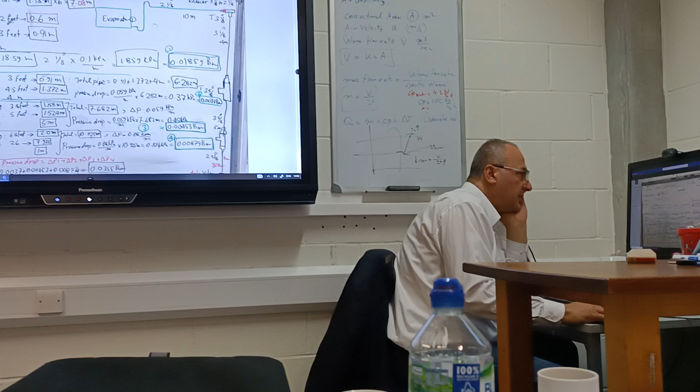Then we have an enlarging coupling, this one. This enlarging coupling will go into that T. So the enlarging coupling is 2 feet, or 0.6 meters.

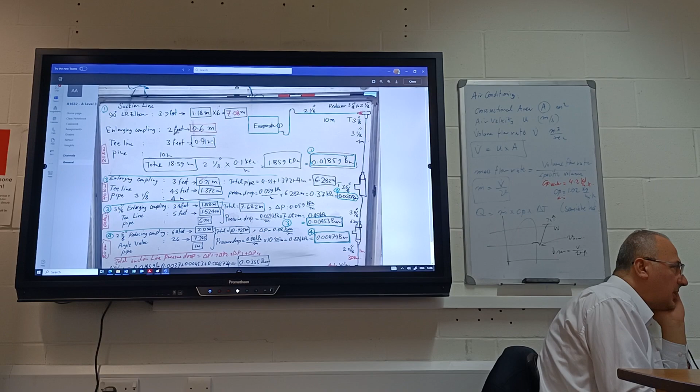Then I have a T, line T, 0.91. Then I have 10 meter pipe. I will repeat it on that diagram. Here.

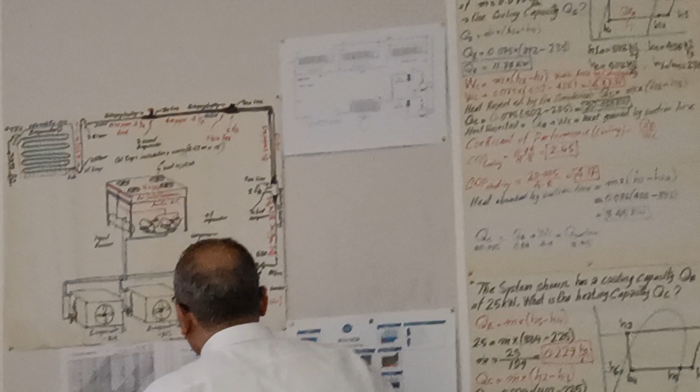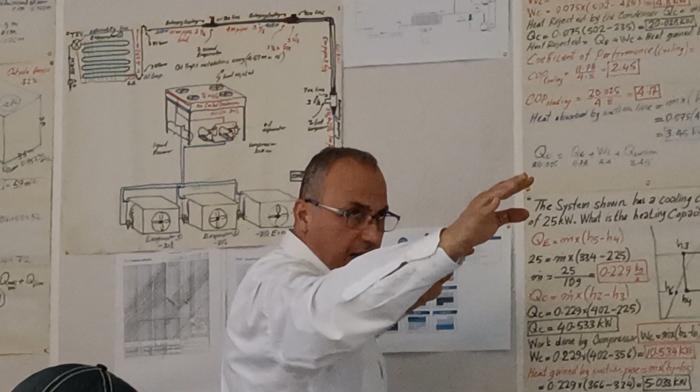It depends how many elbows you count. Here you have 1, 2, 3, you can reduce it, finish. I have 3 elbows, I have 6 elbows there. Each elbow is 1.18, so you can multiply it by 3 now, and you get less than that.

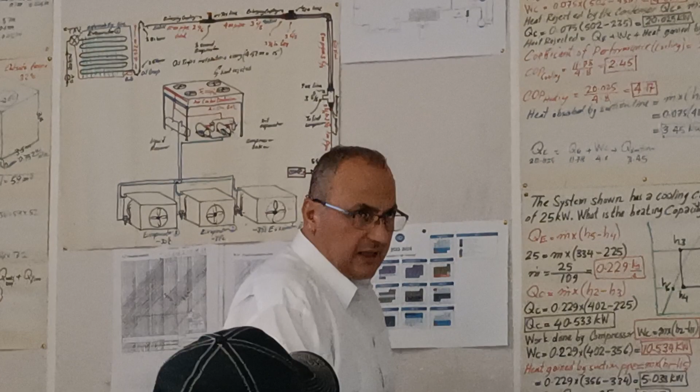Then, this is here to go into the other T that is coming from this one. You see this one? Joining that, so it's joining as a T. That T is a line T. Is a line T, so I have to increase it from 20 kilowatts to 40 kilowatts pipe.

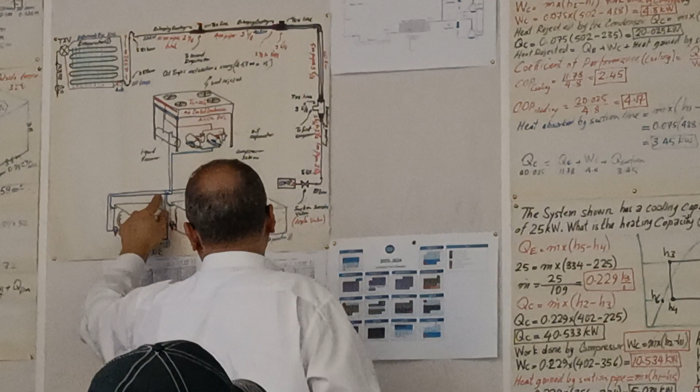I have a short one here, just like half a meter here. So from 20 kilowatts to 40 kilowatts.

So, enlarging coupling, then we go to the T. This T is larger than that. So this T is the one which is larger than that.

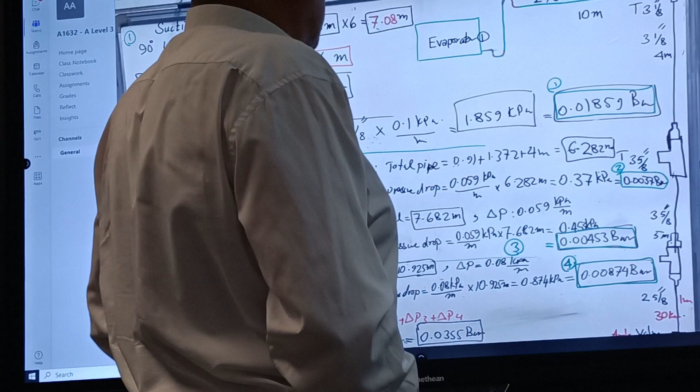It's the 3 1/8 inch. So the pipe, I put it 10 meters.

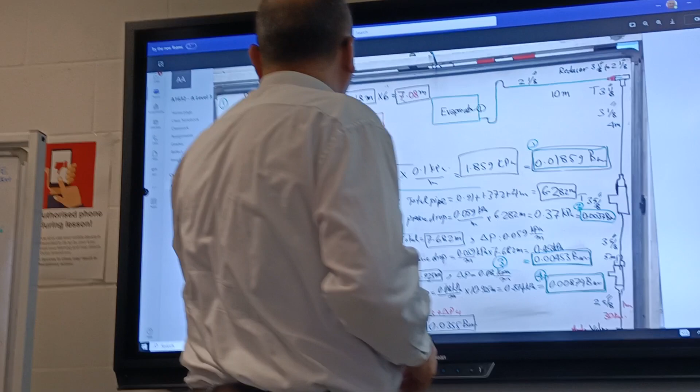You can reduce it now. Anyways, 10 meters here, you cannot reduce it. So I have 10 meters now. The total length, if you reduce this to 3.5, then that will be reduced. So as it is now, it's 18 meters and 59 centimeters.

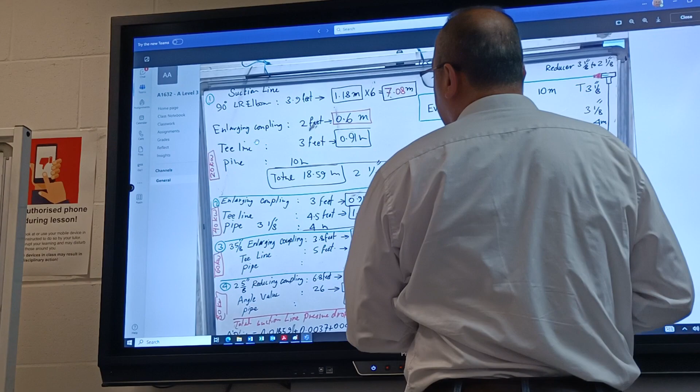This is for 2 1/8 inch. How do we know it's 2 1/8 inch? For 2 1/8 inch, my pressure drop is 0.1. You multiply that, you get that much bar.

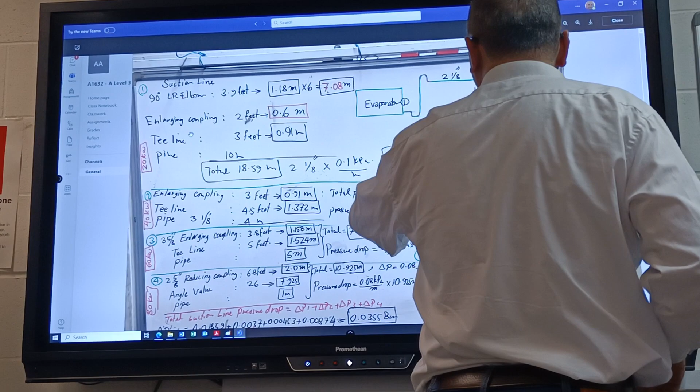Where did we get the 0.1? From the charts. Everyone knows how to get it? Yeah. Just in case if you don't know it, you go to this chart so you don't waste it.

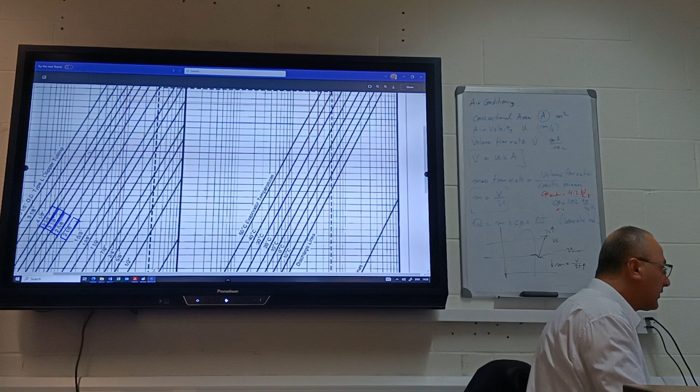You know that we have 20 kilowatts, 30 kilowatts, 40 and 60. That's the 20. You go down from the 20 to minus 30. So 20 to minus 30, I go to the left, I cut all the lines. This line.

Then I go to the condensing temperature at 40 degrees Celsius. This is my line. My velocity according to the suction line is 8 to 10. So I have to be between these two lines, not exceeding 10, not below 8.

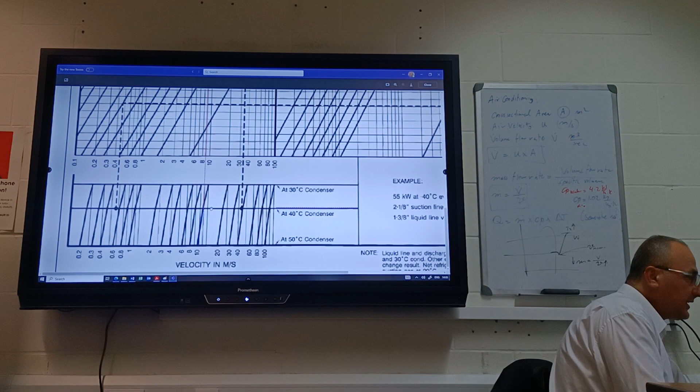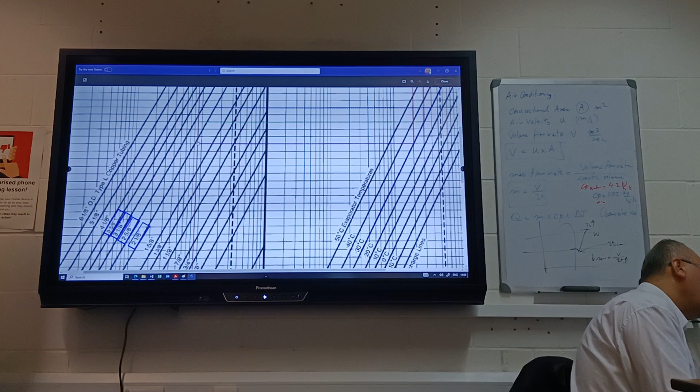Now, from here, I'll draw a vertical line to cut the line that is coming from the 20 kilowatts, which is which one? Red, this one. Violet, this one. Purple. This hand is now between 2 inch and 8 and inch and 5/8.

Inch and 5/8 is too far from it. 2 inch and 8, 2 inch and 8. You cannot go above 2 inch and 8. Because if I go above 2 inch and 8, I will end up here, 2 inch and 5/8.

And I will end up, if you go down, 6 probably, the velocity will be like 6, yeah, even below 6. So we chose that one.

Then I go from 20 to minus 30 again. And the pressure drop now. Yeah, pressure drop chart.

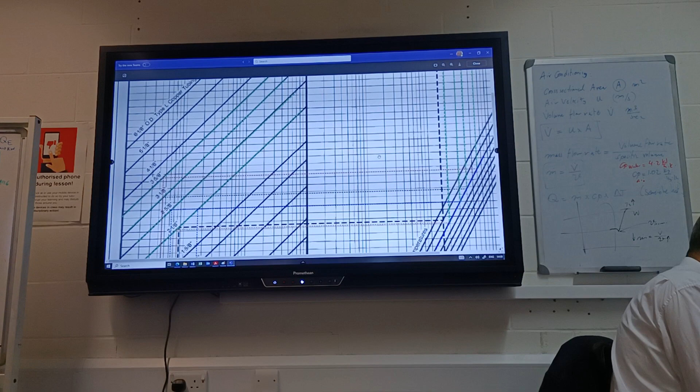Minus 30. From here, I go to the left to the 2 and 1/8 inch. I go to the 2 and 1/8 inch, then I go down. At 40 degrees, it will be here. This is 0.1 kilopascal per each meter.

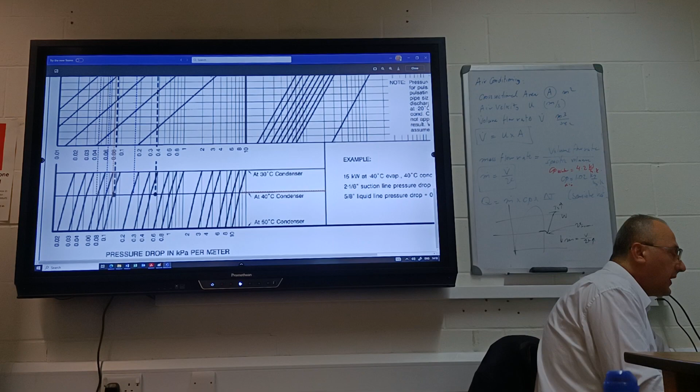0.1 kilopascal per each meter. How many meters do I have? 18.59. 18.59. Times that gives you 1.859 kilopascal, which is, you divide this by 100, it makes 0.01859 bar.

It is too much, but I cannot make the pipe larger. There is only one way to reduce these elbows. If I reduce these elbows, I can remove 3.5 meters from here. It might reduce it, so it depends what you are doing here.

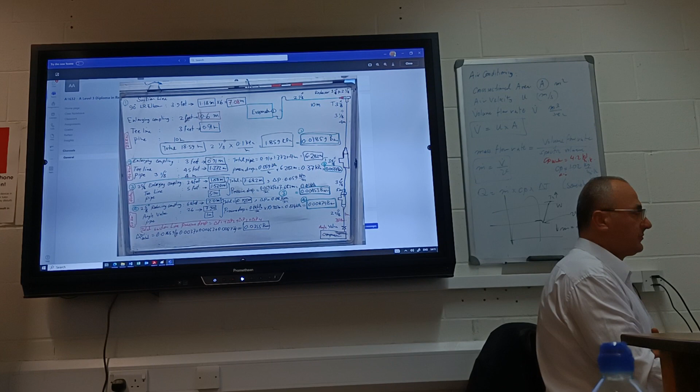You can say this is 8 meters. You reduce the elbows.

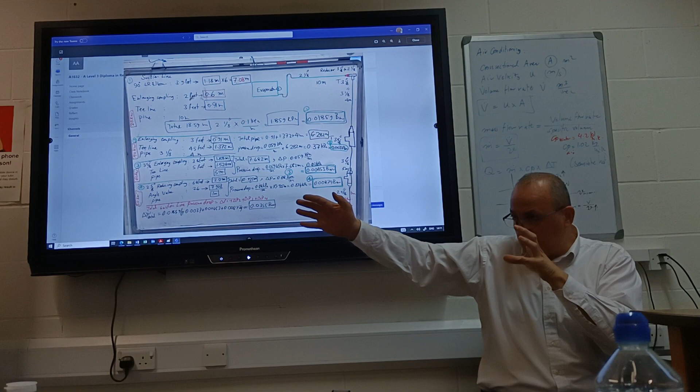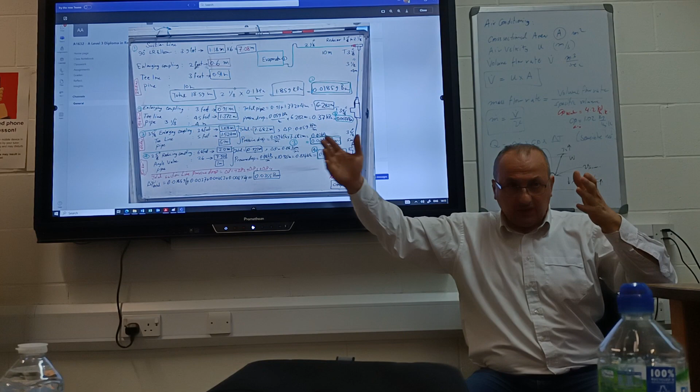But there's no way to do it with less than that drawing. I don't know how big the rooms are. You have to go from the last evaporator to the next evaporator, and very close to that you go up. That's the only way you can do it. So the distance between two rooms - if this is a room and you have another room with an evaporator, that's the size. I know the wall, there is no wall. Then roughly the distance is about a minimum of 8 to 10 meters, for consecutive rooms. So that's the pressure drop.

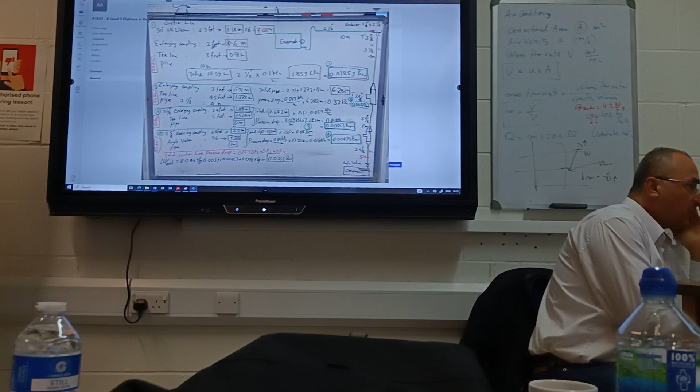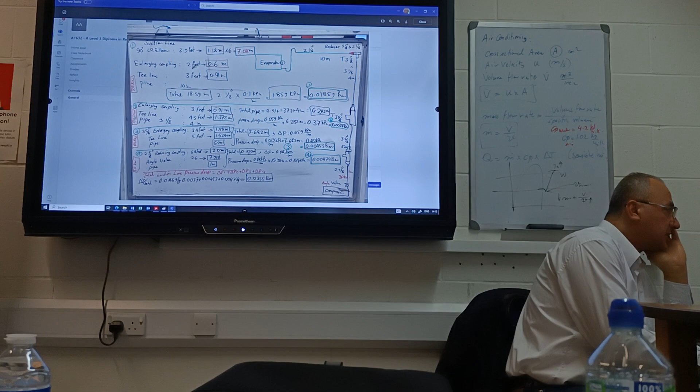You can remove the elbows according to your calculation. So that's the pressure drop for the 20 kilowatts. Now I've already done it here. So the pipe that is going here is 40 kilowatts now, because what I have here is another 20 kilowatts joining this. This pipe is for 40 kilowatts now. Then you go for 40 kilowatts. You see here? Number 2, 40 kilowatts. I need to select the pipe first for 40 kilowatts. How do I do it?

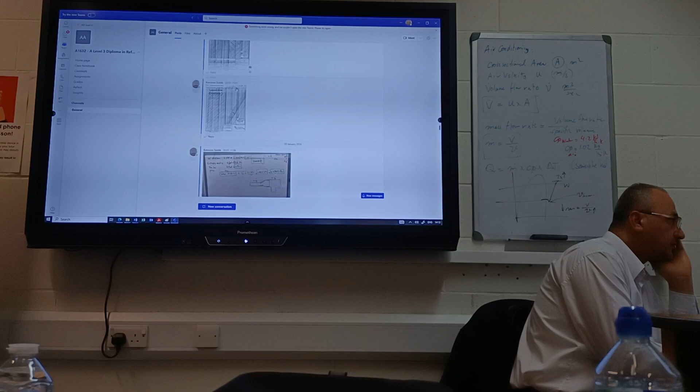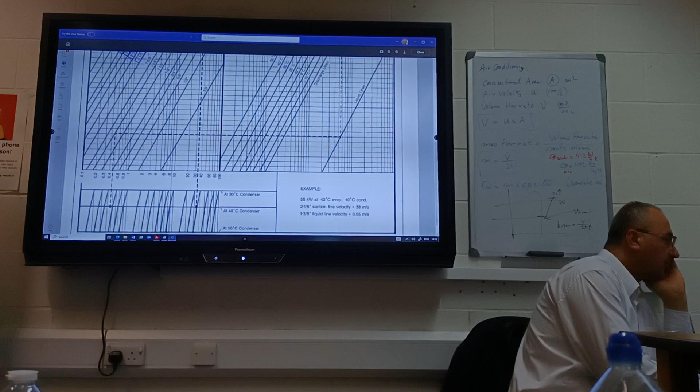The same way, using the velocity chart. You go to the velocity here. That's 40. You go down here. You go to the left. Then you go from 40 here. Condensing temperature at 40 degrees and 10 meters per second. You go up.

Two inch 5/8 - the blue one. One up, yeah, 40, yeah, that's 40. That's 20, that's 30, that's 40. So we are between 2 inch 5/8 and 3 inch 1/8. It's close to 2 inches - the 2 inch 5/8, because it's cheaper and closer to it, so we go with the cheapest one. We try that, and if it didn't work, then we change it. 2 inch and 5/8 now.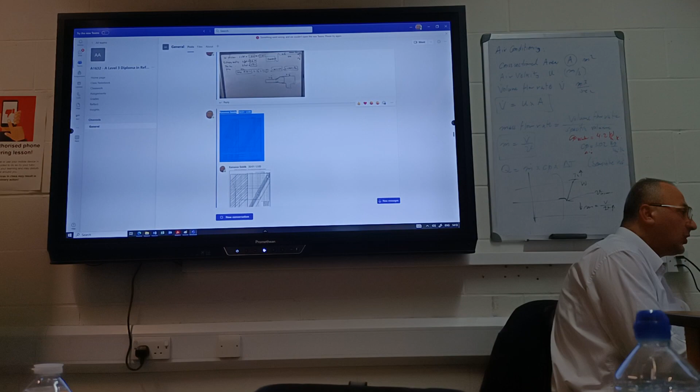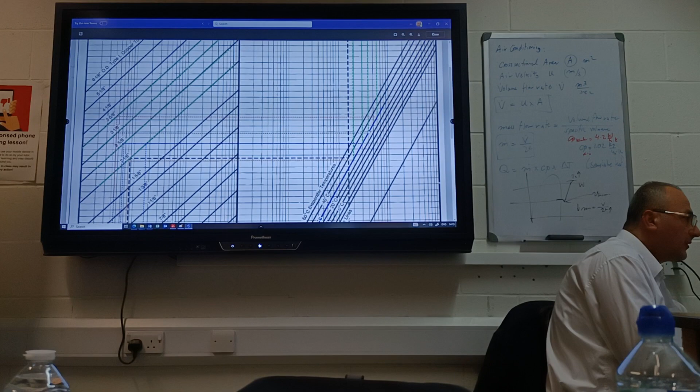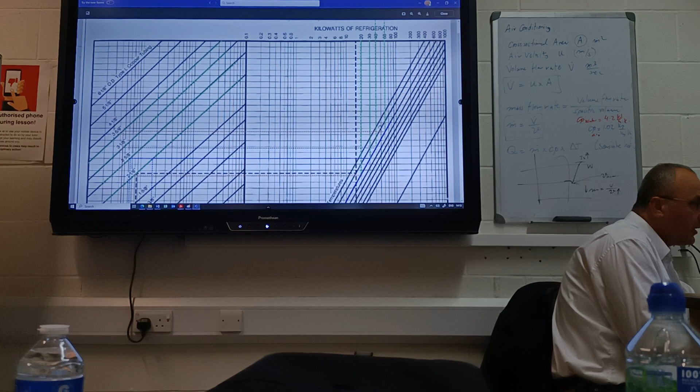You go to the pressure drop chart. 2 inch 5/8, at 40, you go down here. Temperature, 2 inch 5/8, you go to the left. Yeah, it's the blue one - blue line, 40. No, black one. Condensing evaporating temperature is -30. Yeah, yeah, the blue line. No, blue. 30, yeah, 40, you go down.

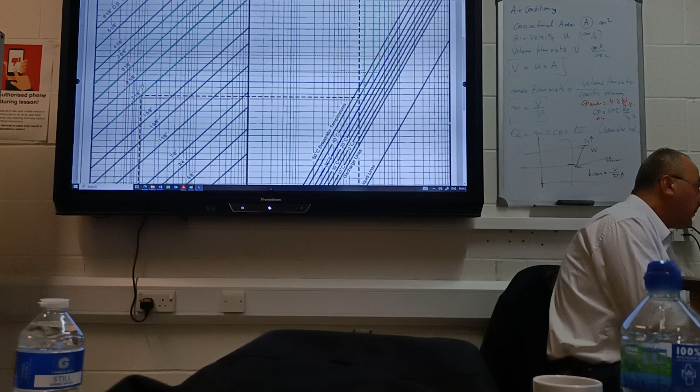Maybe we made a mistake, I don't know. Let's go back - what was the size? 2 inch and 5/8? If it's 2 inch and 5/8, we will end up here. You go down, you go down, you go down, you end up somewhere here. It's 0.12. 1, 2, let's see. What did we choose? 0.12. 0.059.

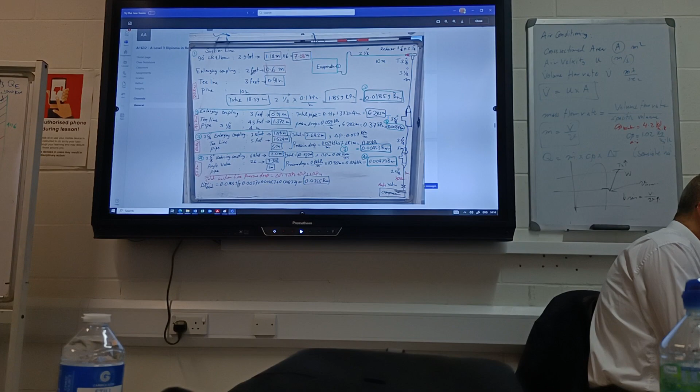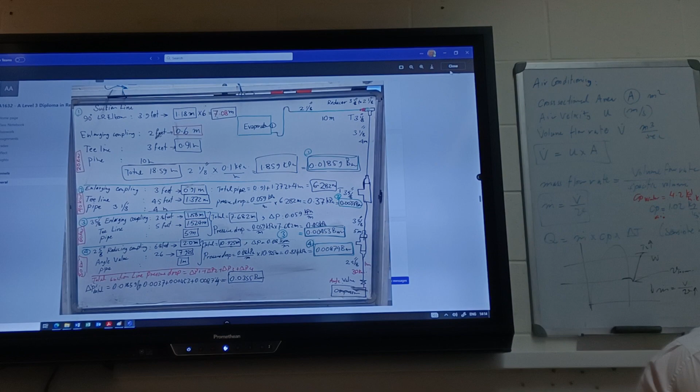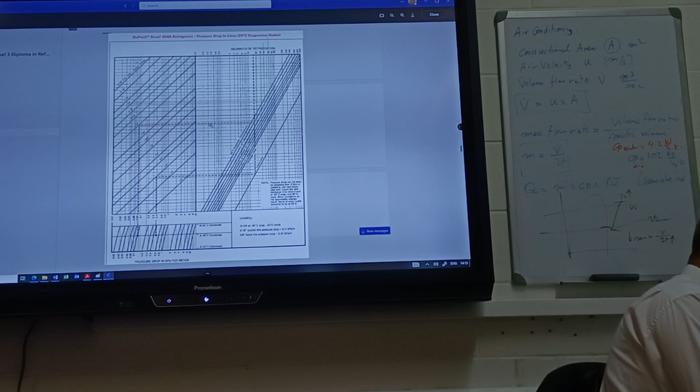You made a mistake. What is the pipe? 3 inch and 1/8. You see, we changed it, because that wasn't good. We go for 3 inch and 1/8 - the pressure drop was too high. We went for 3 inch and 1/8. If you go back again, the black line, we go to 3 inch and 1/8, and we go down, because if it's here, it's too much pressure drop. So 3 inch and 1/8,

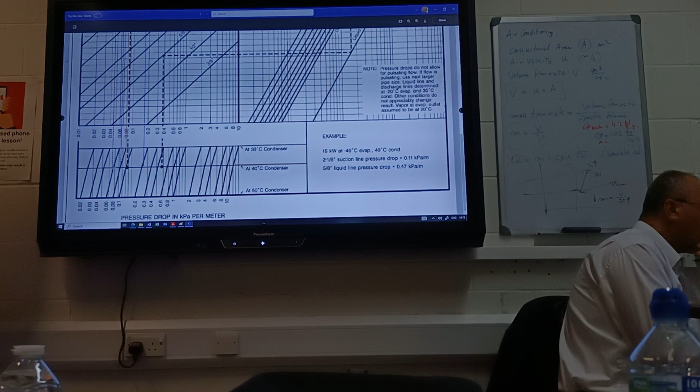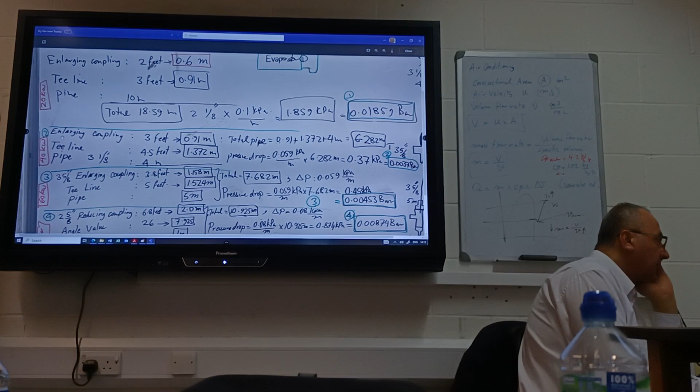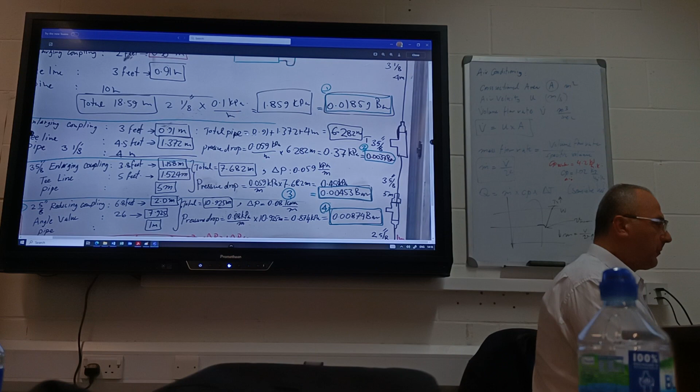0.06, smaller below that - 5.9, 0.059. That's 0.06, we are at 0.05 something. So if we go for 0.059 or 58, then we have an enlarging coupling. We go from the small pipe - look at it, the enlarging coupling is here. We go from here to the enlarging coupling and we go to a T. So the enlarging coupling is that much, the T line is that much, and we have 4 meters of pipe work. So all of these will make 6.2 - how many meters? 6.28, 6.282 meters. Total pipe length is 6.282 meters. You multiply that length by the pressure drop from the pressure drop chart, you'll get

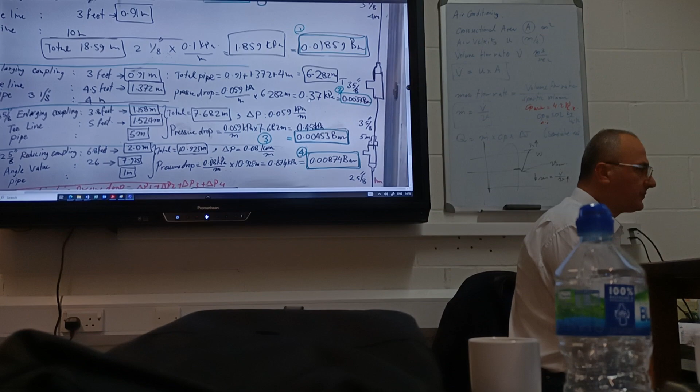0.37 kilopascal, which is 0.0037 bar. Next, we go from here to 60 kilowatts, because we now have another 20 joining. I have 60 kilowatts. From the 60 kilowatts, it goes to one compressor.

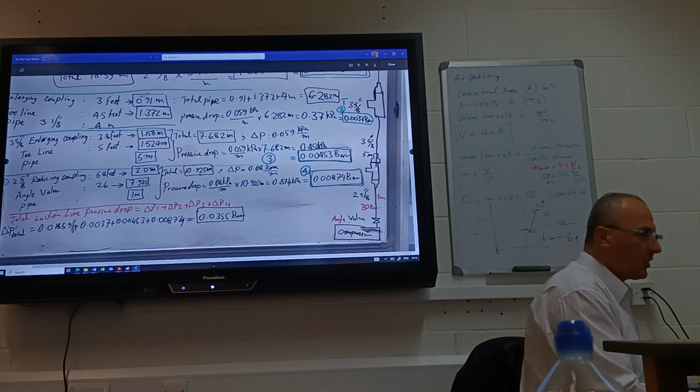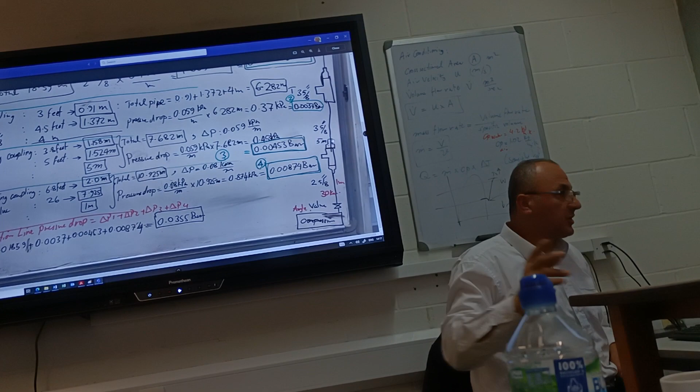Actually, that 60 kilowatts goes straight into a T. Is that right? We said, by the enlarging coupling, it goes into a T. If you remember the drawing here, it goes to the T straight away. You cannot reduce it, I'm not reducing it here, so that one doesn't exist. It goes to the T. The reducer is here and the reducer is here. So this is going straight to a T, I have to remove that one.

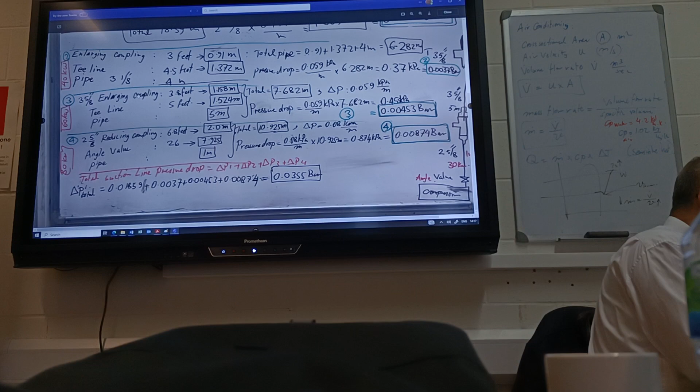So that's 60 kilowatts, so you remove the enlarging coupling then. We don't have enlarging coupler, so that should go out of this. You have a T line which is 5 feet, that much. So the total length is 6 meter 52. You have to multiply 6 meter by that number. 3 inch and 5 feet.

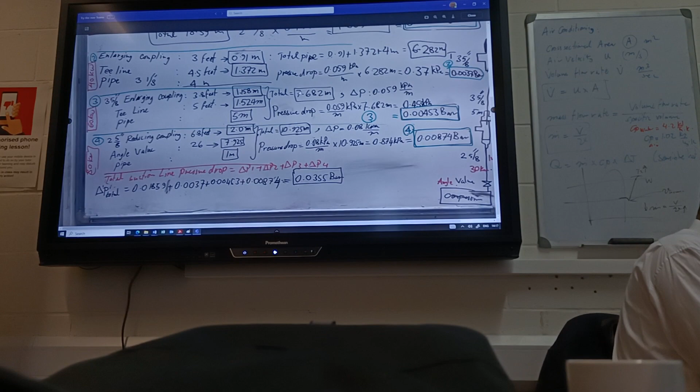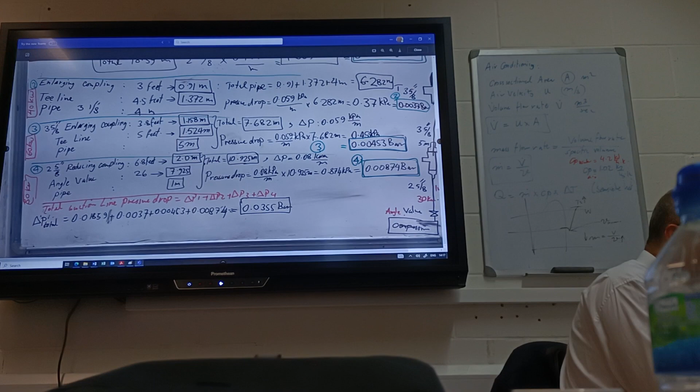How did we get this number? Doesn't matter this number, you make that number. It depends on your design. Everyone cannot be the same design. So whatever number here, if it's reduced to 6 point something, you multiply it by that. How do we get that? We go back again here.

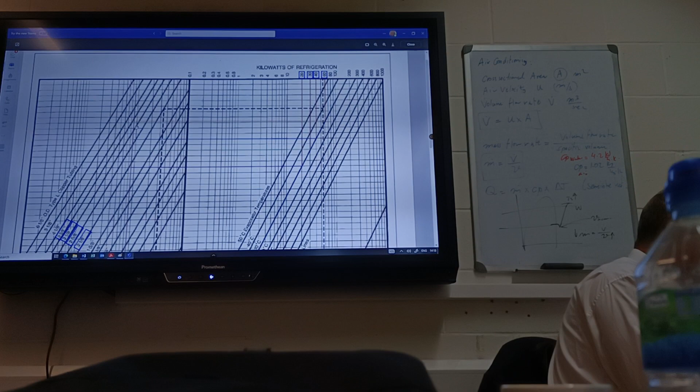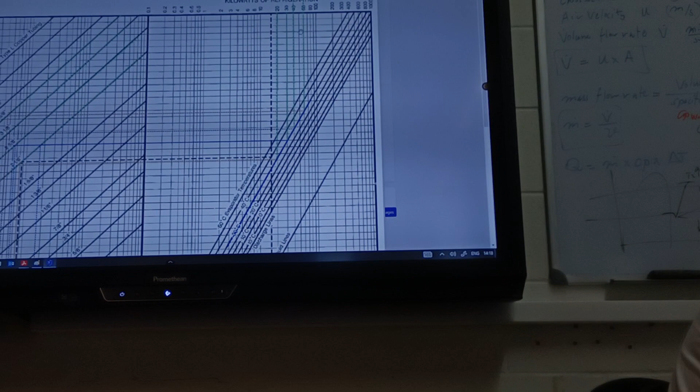60 going down to minus 30, going to the left. That's 10. 10 is meeting the top line. It's, if you go here, it's between 3 inch and 1/8 and 3 inch and 5/8. 3 inch and 1/8 to 3 inch and 5/8. The 3 inch and 1/8, we go 60 from here, we go here. To 3 inch and 1/8 is here, but it was closer to 3 inch and 5/8. If you go to 3 inch and 5/8, then there's a red line here.

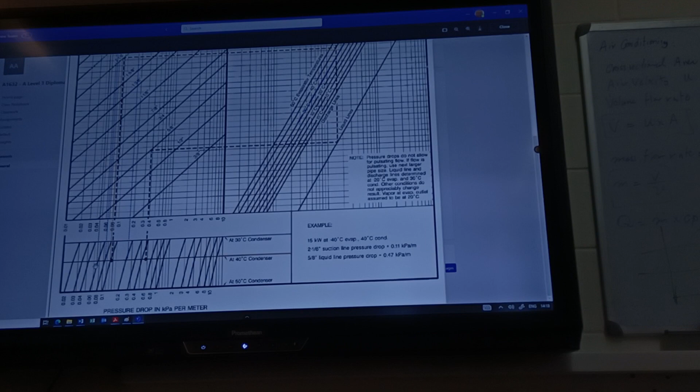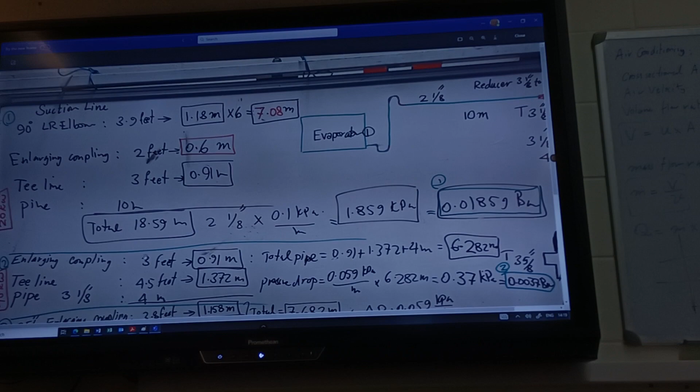We are again at 0.059 at this point. Back to here. 60 kilowatts, 3 inch and 5/8, 0.059. You multiply it by that 6 meter, because we remove this from it. You'll have less pressure drop here.

Now after that T, so it goes to a T and branching. Yeah, it's branching based on that drawing. If we go to the drawing here, I think he took it and put it here.

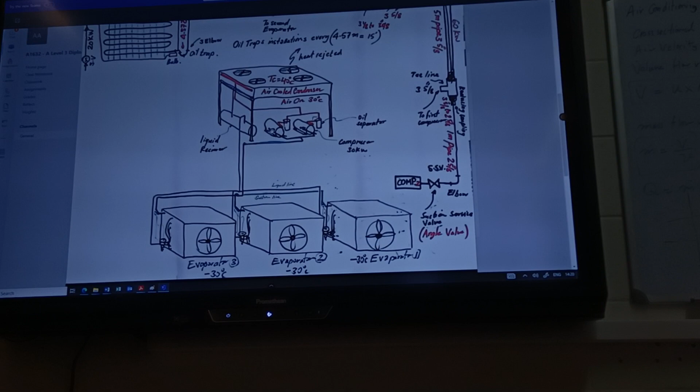If you see, that's 60 kilowatts, that was the elbow, is another elbow, it goes into a T. This is 60 kilowatts from here to here. While this T is 60 kilowatts, we already calculated that. Then we have 30 kilowatts. We go to the one further away, which is this one. On here, I have to reduce it to 30 kilowatts now. That's 60, goes to 30 and 30. So reduce it, elbow, suction service valve. Reduce it, elbow, suction service valve.

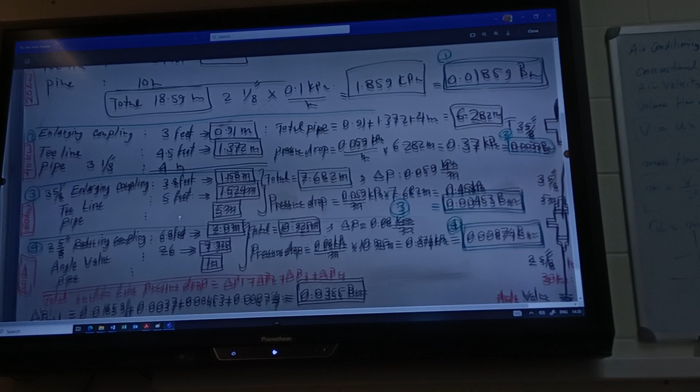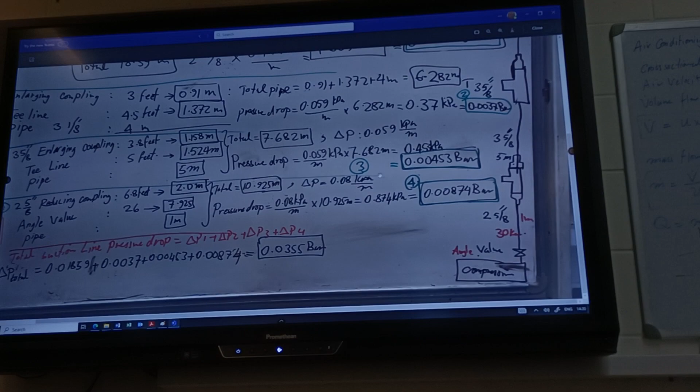Section 4, reducing coupling. We need an elbow here, while the other stuff will remove from here, and we need the angle valve, and we have the pipe, which is 1 meter. All of these, according to here, is 10.925 meters. You have to add elbow here.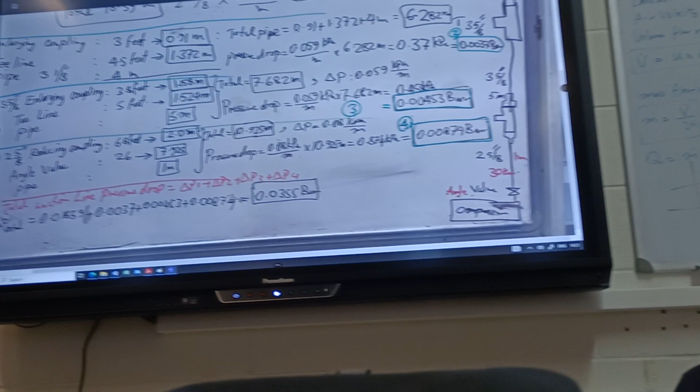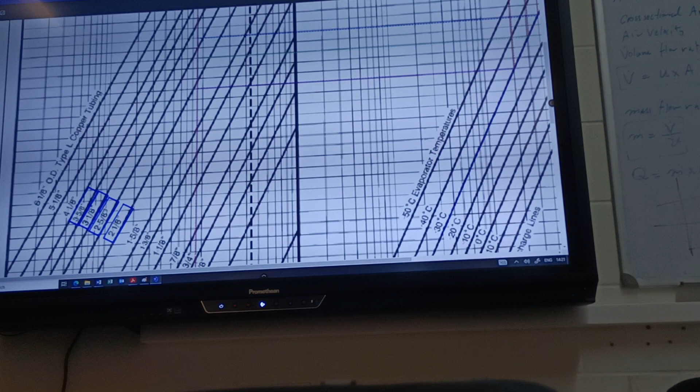Pressure drop is 0.08. How did we get that? We are going back to here. We have 30 kilowatts. We go down, left, the green line. From here we go up to the green line. The green line is between 2 inch and 1/8 and 2 inch and 5/8. 2 inch and 1/8 and 2 inch and 5/8.

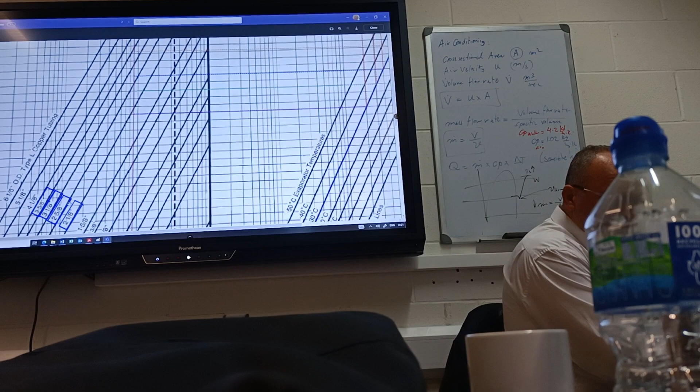And he said that the compressor is 2 inch and 1/8, yeah? No, but our pipe is 2 inch and 5/8. Yeah, this is what you find. So this is 2 inch and 5/8. Let's see on here, if you go from 2 inch and 5/8, this is the one. 30, you go down to the left to 2 inch and 5/8. You go down to here.

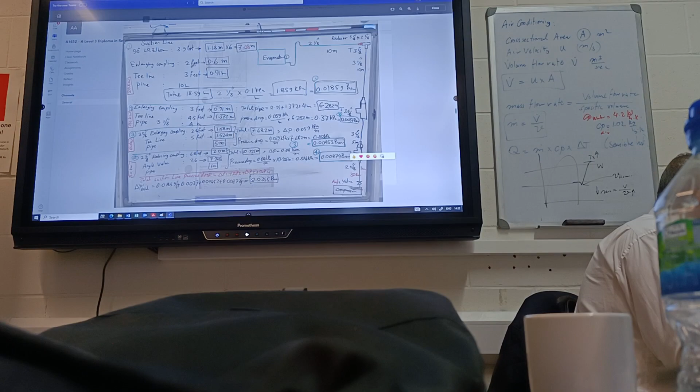0.08. 0.08. That's 0.08, remember that's kilopascal per meter. You multiply it by the number of meters, it gives you that much. You change that to a bar, you get that many bar.

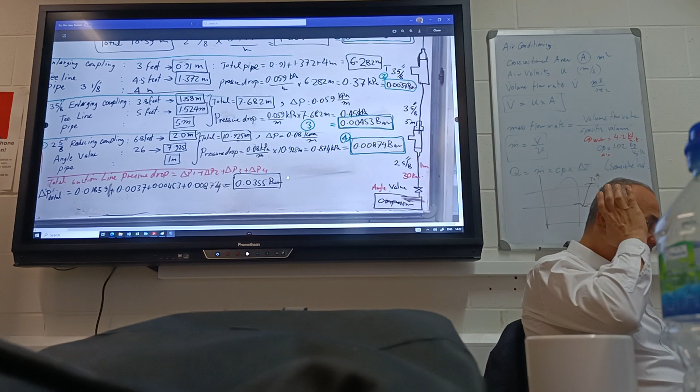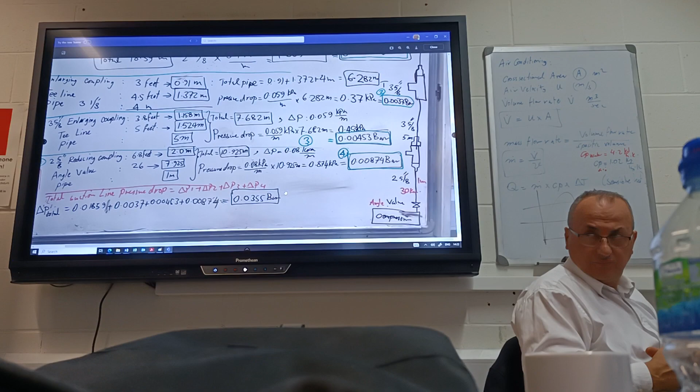So we will have pressure drop, which is 0.03 bar. That's equivalent of 3 degrees Fahrenheit, which is 1.5 degrees Celsius of saturation temperature. That's the best we can do. Thank you. Unless we remove 2 elbows.

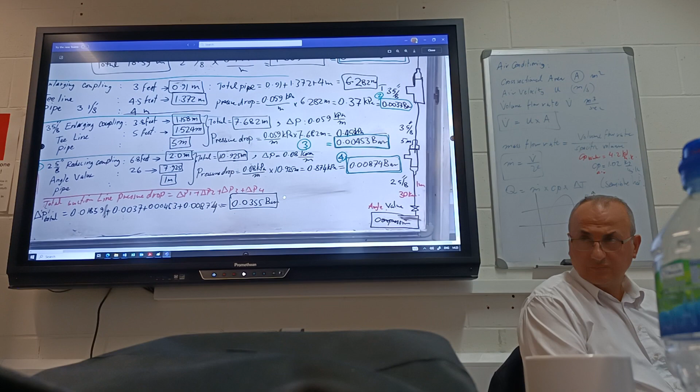Well, for hot gas, how do we calculate the size? What do you mean hot gas? Hot gas.